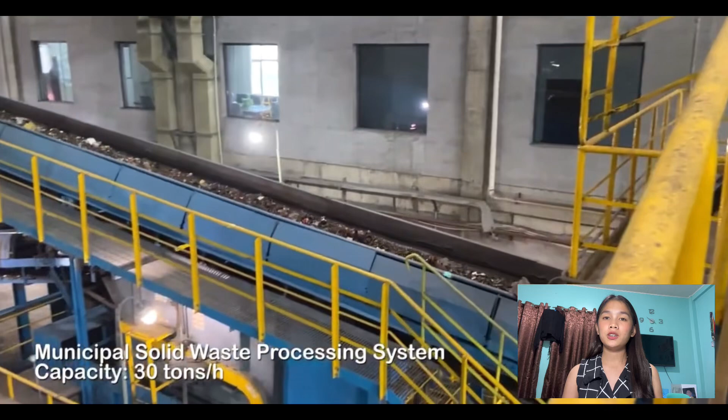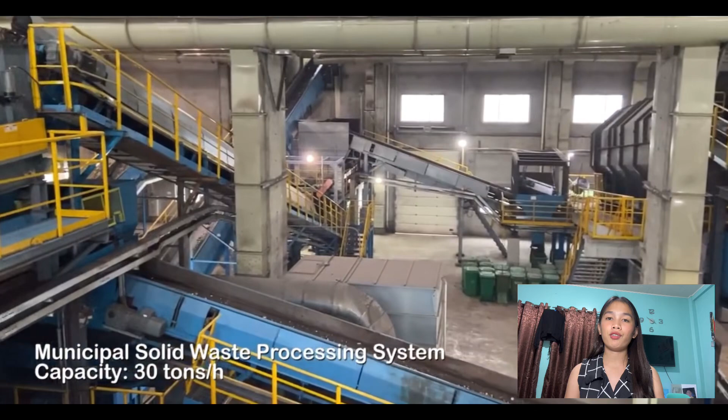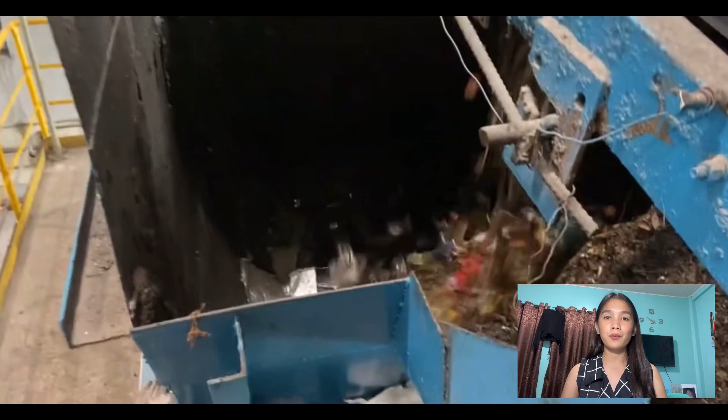Analysis of slope stability is a critical issue for effective landfill operation. Seismic effects of municipal solid waste landfills have been widely studied and investigated in recent years. Various techniques and models are applied to describe the municipal solid waste characteristics under seismic conditions, including the dynamic stability of newly constructed and extended landfills.

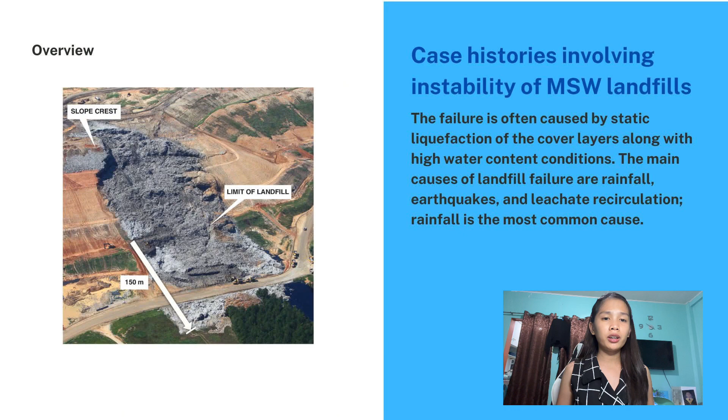Landfill instability has been the subject of numerous recorded occurrences in recent years. The landfill failures can be separated into two categories: uncontrolled or open landfills and engineered or sanitary landfills. Flow slides in the MSW body, slips along the layers or the foundation, and failures like cracking in the cover layers or the MSW body are examples of failures in engineered or sanitary landfills.

From an engineering geology viewpoint, landfills can be regarded as artificial geological bodies composed of municipal solid waste with macroscopic structural planes between the waste materials. The artificial geological body has a special structure and occurs in a certain geological environment. There are similarities and differences between a waste body and a body of natural soil or rock mass. For example, both the artificial and natural bodies are influenced by changes in the geological environment.

However, the interaction between the waste body and the geological environment will be more sensitive than that of natural geological bodies because of the heterogeneous nature of the municipal solid waste and because the properties of the waste material vary with time.

The geologic body or internal factors and the geo-environment or external factors can be used to discuss the determinants of landfill stability. The engineering characteristics of the municipal solid waste on a mesoscale and the waste body's structural features on a macro scale are two perspectives from which to examine the internal causes. Furthermore, the impact of outside variables such as dynamic engineering geological processes is also examined in Figure 1.

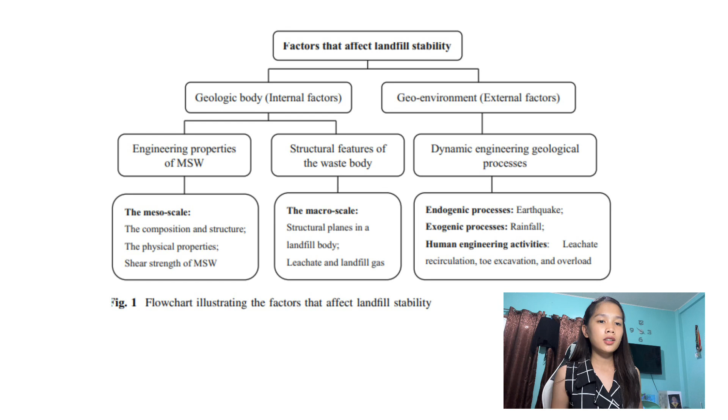The composition and structure of municipal solid waste. Its composition is more complicated than that of natural soil. It usually includes food waste, paper products, textiles, plastics, rubber, ash, and so on. Most organic matter can be decomposed by microorganisms, and some inorganic matter can be chemically decomposed. However, most inorganic matter cannot be decomposed or decomposes very slowly.

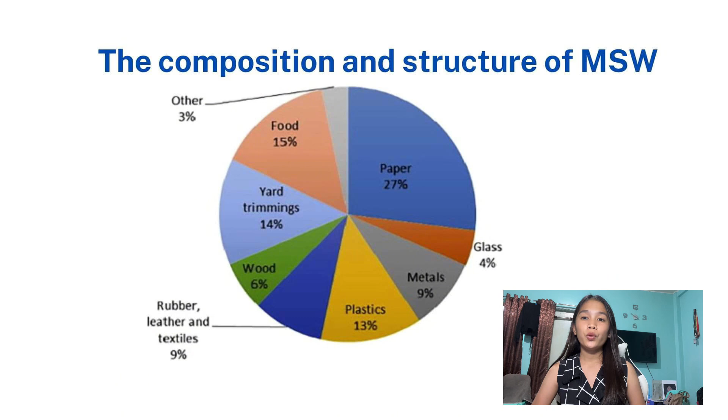The composition and the proportion of the municipal solid waste components in the waste body will vary with time, leading to significant differences in their engineering properties. The time-dependent properties of municipal solid waste must be considered when discussing the engineering properties of waste.

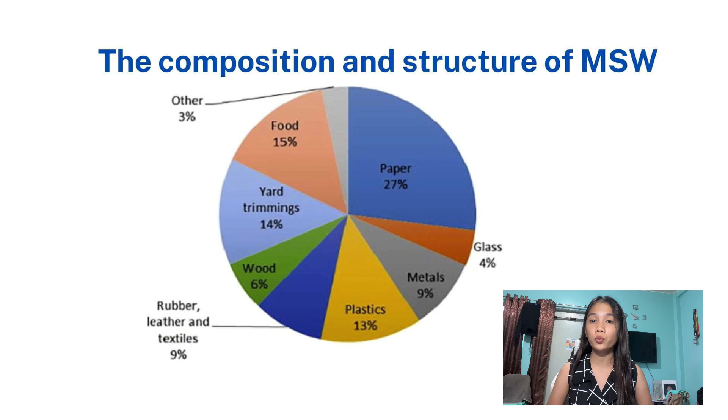During the initial stages of decomposition, the municipal solid waste properties are different from those of soil because a large part of municipal solid waste consists of organic waste and some inorganic matter. As the decomposition process proceeds, the proportion of soil granular medium increases. Some of the reinforcing phase loses its reinforcing effect and the municipal solid waste acquires the properties of soil.

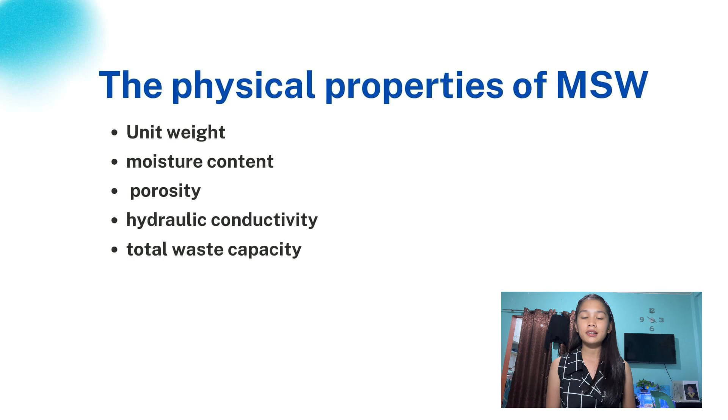The physical properties of municipal solid waste. The unit weight, moisture content, porosity, hydraulic conductivity, and total waste capacity are among MSW's physical characteristics. The geotechnical qualities of municipal solid waste are mostly influenced by its physical attributes.

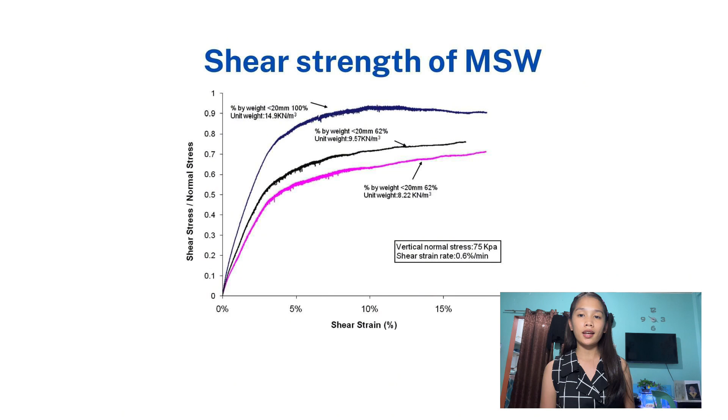Shear strength of municipal solid waste. Evaluating the shear strength of municipal solid waste is a crucial aspect of landfill studies, especially when it comes to static and seismic slope stability evaluations. Shear strength can be estimated using a variety of techniques, including a load test, laboratory testing, field testing, and back analysis of field case histories.

Next is the structural features of the waste body. The structure control theory holds that the behavior of a rock mass is governed by its structural geological features. It is used in engineering geology to characterize soil or rock mass.

The macroscopic structural planes of the landfill body are the interim cover soil, the partial soil foundation, and the landfill's bottom liners. Landfills exhibit different top-down characteristics due to the varying ages of the materials within the waste body, the impact of the degree of deterioration, and the presence of intermediate covering soil layers.

Then, the structural planes in a landfill body. The behavior of the planes governs the strength and deformation behavior of a geological mass with a layered structure. Layered geological bodies are prone to deformation and sliding along the bedding.

The conceptual framework that describes the physical and chemical characteristics of landfill garbage and the surrounding geological environment is known as the geological model of a landfill body. Leachate production, pollutant transport, and the long-term environmental effects of landfills are all commonly understood using this model.

The bottom liners and a portion of the foundation soil, the interim cover soil, the top cover layer, and the interface surfaces of the landfill expansions are examples of structural planes in landfill bodies. The municipal solid waste is supported by liner systems, which are utilized to stop subterranean water penetration and restrict and regulate the flow of polluted fluid.

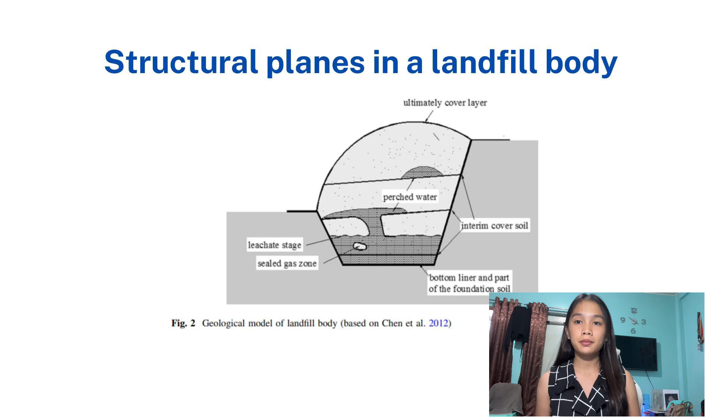The liner system often acts as a potential sliding surface, and failure can occur as a result of sliding along multiple interfaces within the landfill liner system. Then last in structural features of the waste body is leachate and landfill gas. Leachate comes from the liquid in the waste and it is enhanced by water infiltration and rainfall.

Heavy metals, inorganic macrocomponents, dissolved organic debris, and xenobiotic organic compounds are among the contaminants found in landfill leachate. Studies of the influence of leachate on the stability of the waste mass showed that leachate within the waste mass has a negative effect on the stability. The decrease in stability is in approximate accordance with increased leachate yield.

Landfill gas is generated within the landfills by decomposition reactions, including anaerobic biodegradation of the organic waste content and chemical decomposition of some inorganic matter in the municipal solid waste. The landfill gas consists of methane, carbon dioxide, oxygen, and non-methane organic compounds.

The production rate of landfill gas is proportional to the organic matter content and is modeled as an exponentially decreasing function of time. The generation and migration of landfill leachate and gas have a negative effect on landfill slope stability. In sanitary landfills, the amount of leachate and landfill gas can be limited and recycled by a landfill collection and removal system. However, in open landfills, leachate and gas collection and removal systems are rarely available.

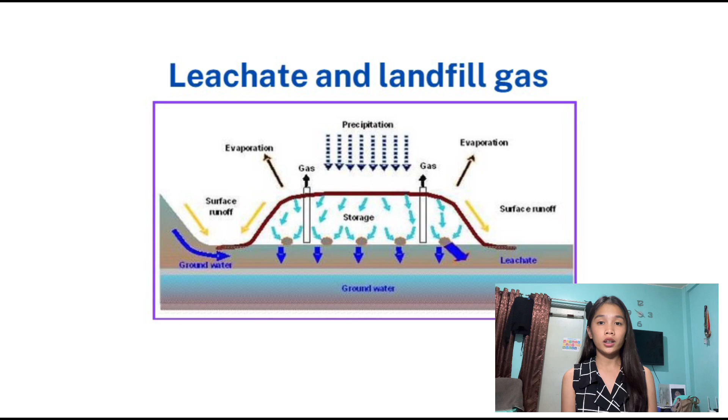And in external factors is the effect of dynamic engineering geological processes. An artificial geologic body influenced by dynamic engineering geological processes is what is commonly referred to as a landfill body. These processes include engineering geological processes brought on by human activity as well as natural cycle geological processes that impact and jeopardize engineering endeavors. There are two types of geological processes. The first one is endogenic and the second one is exogenic.

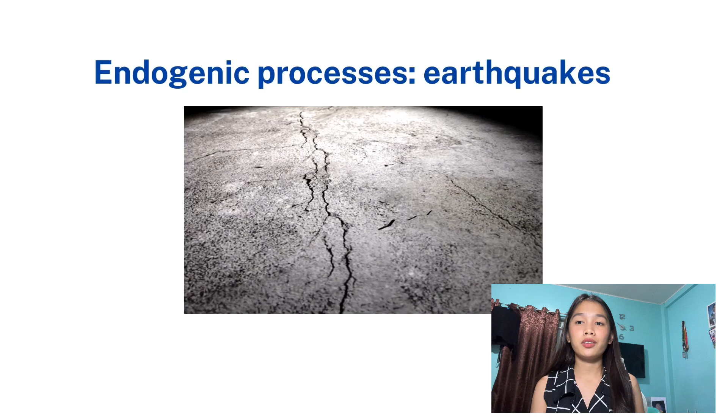Earthquake and volcanism are examples of endogenic processes that are brought on by internal earthly forces. There are several ways in which earthquakes can significantly impair the stability of landfills. Permanent displacement brought on by an earthquake could harm the internal pipe or network utilized for leachate collection or circulation.

Then, in the exogenic processes, the forces on or above the Earth's surface are the source, such as rainfall. Rainfall and water erosion are the main factors affecting landfill bodies. The most frequent cause of geological body failure is rainfall. Then last is the human engineering activities: leachate recirculation, excavation, and overload.

In a bioreactor system, leachate recirculation is used in some sanitary landfills. Apart from energy production and easier leachate management, landfill bioreactor technology offers many benefits including faster subsidence, higher stabilization rates, and quicker decomposition of trash. Leachate evaporation and leachate absorbance by the waste body can reduce the overall volume of leachate during recirculation.

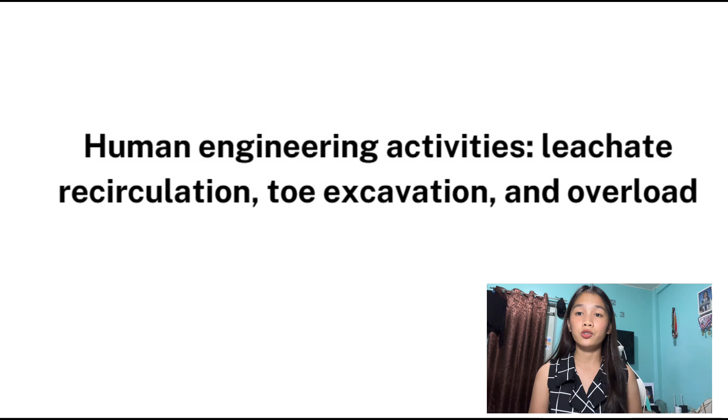Based on the landfill failure cases reviewed in this paper and on engineering geological analysis on municipal solid waste landfill stability, some suggestions for landfill operation are presented. The study of modern landfill stability should concentrate on the weak foundation soils and the geosynthetic interfaces rather than the municipal solid waste, because so many landfills fail due to sliding over many interfaces inside the landfill liner system and weak subsoil. Certain steps can be taken to avoid failures, like adopting geosynthetic materials with rough surfaces and improving the foundation's design.

And that's all for the presentation of engineering geological analysis of municipal solid waste landfill stability.